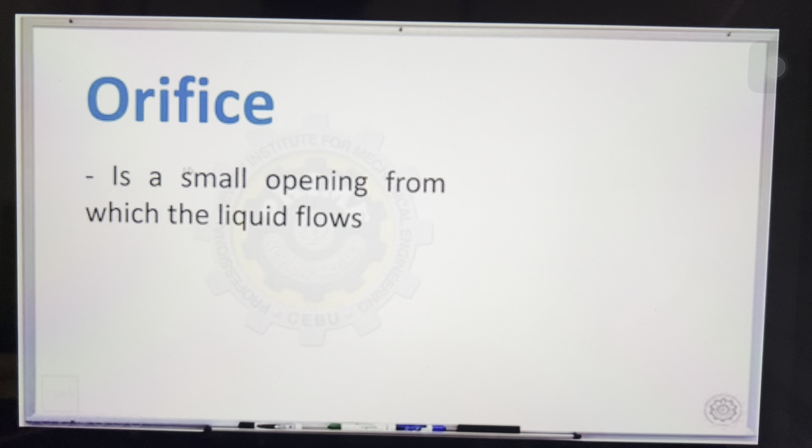Okay, now let's talk about orifice. An orifice is a small opening from which the liquid flows. So ito yung ating visual. Okay, so this is our orifice. And then magpa-flow dito yung liquid.

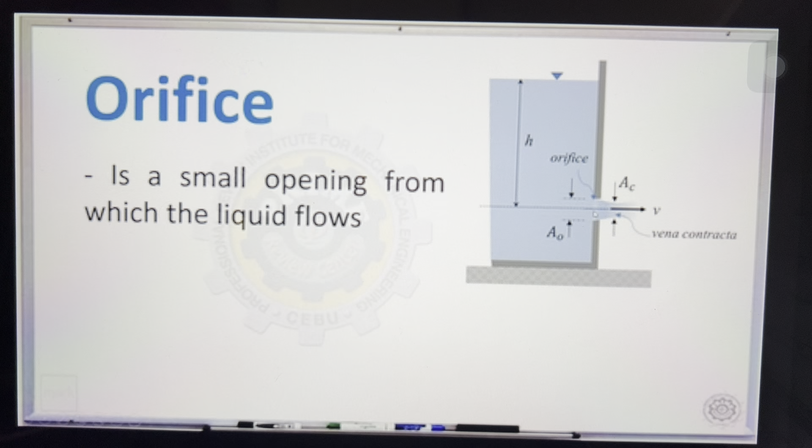So magbibigay ng certain height dito from the top surface hanggang sa opening ng orifice. And then merong velocity. Now kindly take note na yung section at which the cross-sectional area of the jet is

minimum and always less than the orifice is known to be the vena contracta. So meron ditong certain portion na minimum yung area ng ating cross-section ng jet. At ang tawag sa minimum cross-sectional area is the vena contracta.

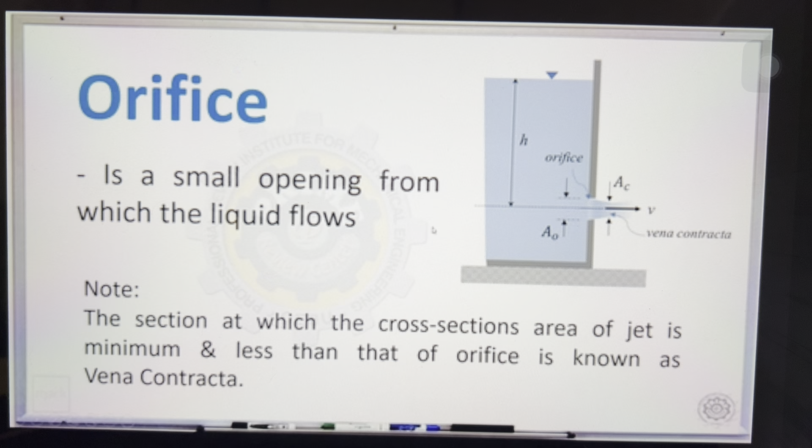Now, regarding sa orifice, marami tayong pwedeng tanungin na coefficients dito. So isa-isahin natin yung mga formula to be used. Okay, so we have hydraulic coefficients. Kindly remember na pag magkakalculate ng coefficients, that is ratio ng actual over ideal value. Laging mas malaki yung ideal value.

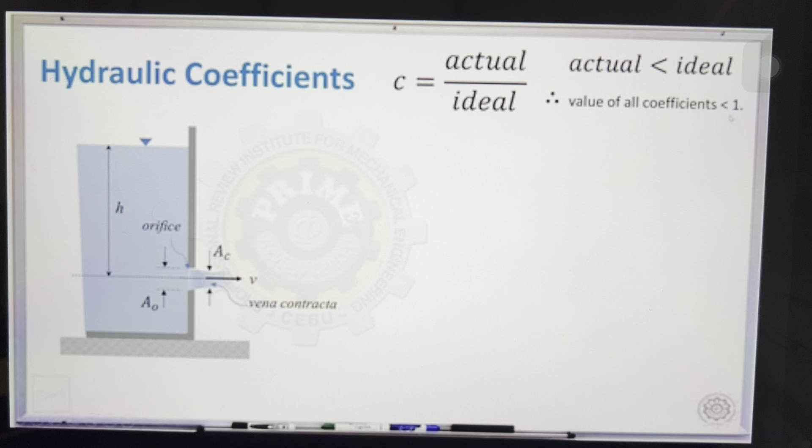So yung actual value is maliit na value over malaking value. Since it is always less than the ideal, na-expect nating value ng hydraulic coefficients is less than 1. Kapag actual tsaka ideal equal, ang value niya is 1. So less than or equal to 1. Now, we have the coefficient of velocity, CV, coefficient of contraction, CC, coefficient of discharge, CD, and then coefficient of resistance, CR. So, isa-isahin natin.

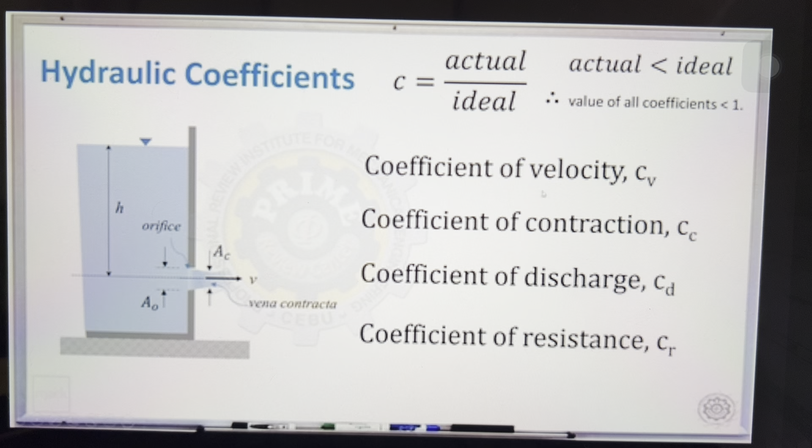Let's start with the coefficient of velocity. Ang coefficient of velocity, ratio siya ng dalawang velocity. Actual velocity of the jet, paglabas, over the ideal velocity at the orifice. So ratio siya ng dalawang velocity.

Now, para makakuha tayo ng velocity, ang formula natin dyan is square root of 2gh. So para sa actual velocity ng jet, dito yung kukunin, so square root of 2gh prime. Para naman sa orifice, dito manggagaling yung velocity paglabas sa orifice, square root of 2gh din. Kasi yung h na gagamitin, ito.

Now, mathematically speaking, pwede natin i-substitute dito, cancelled out 2g, and then ang matitira dyan is yung square root. Pinagsama ko na lang yung square root sign. So you can cancel out 2g, and ang matitira is square root ng h prime over h. Dito yung sukatan ng h prime para sa actual velocity of the jet, ito naman sa ideal velocity. Maiksi lang yung formula, so tandaan yung shortcut na yan. Next,

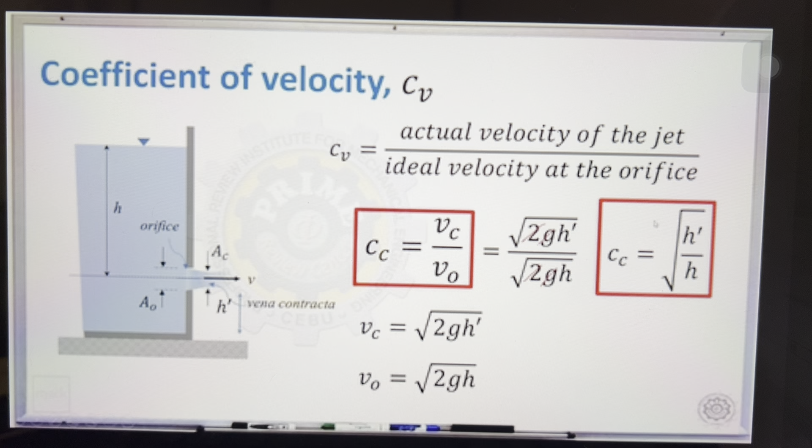coefficient of contraction. That is ratio naman ng dalawang area. Actual area of the vena contracta over the area ng orifice. Yung ideal area natin is the area of the orifice. So ratio ng dalawang area.

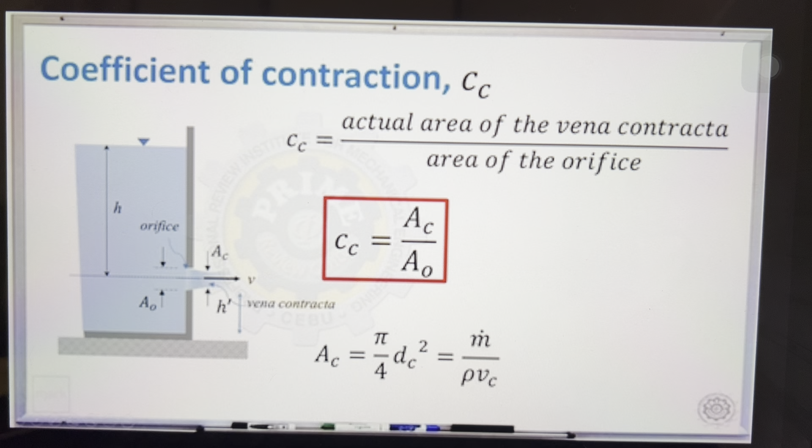Para makakuha ng area, pwede kang gumamit ng pi over 4 d squared, or mass divided by density times velocity. Ang pinanggalingan lang nun is rho AV. You remember, mass flow rate is rho AV. So kung gusto mo makuha yung area, mass i-divide mo ng density times velocity.

Now, para naman sa area ng orifice, kung hindi siya given, pi over 4 diameter ng orifice squared. Pero typically, yung area ng orifice is already given. So this is another formula. You can cancel out pi over 4, and then you can factor out yung naka-squared. So pwedeng ratio ng area, pwedeng ratio ng diameter, kaya lang naka-squared. So this is coefficient of contraction.

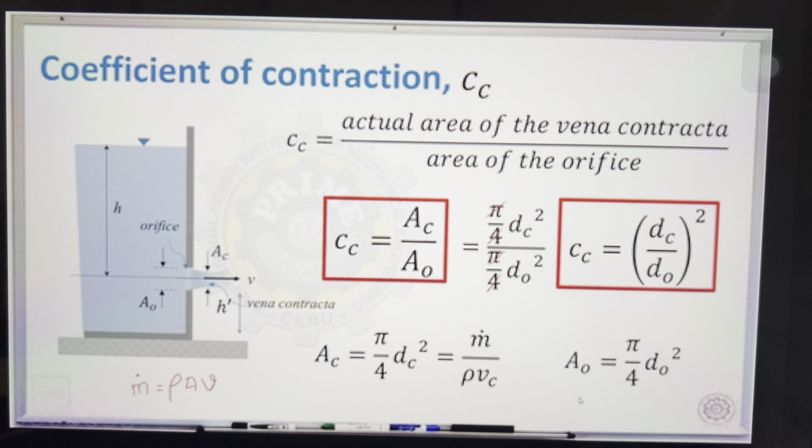Next is the coefficient of discharge, CD. Ratio naman to ng dalawang volume flow rate. This is the actual discharge at the vena contracta over the ideal discharge at the orifice. Mas malaki yung volume dun sa ideal discharge. So ratio ng dalawang volume flow rate.

Now, pwede tayo mag-simplify. Yung volume flow rate sa contracta is area times velocity, and then for the orifice, that is area multiplied sa velocity, kasi formula, Q equals AV. Pag sinubstitute natin dito and simplify further, meron tayo ditong ratio ng dalawang area. That is called CC.

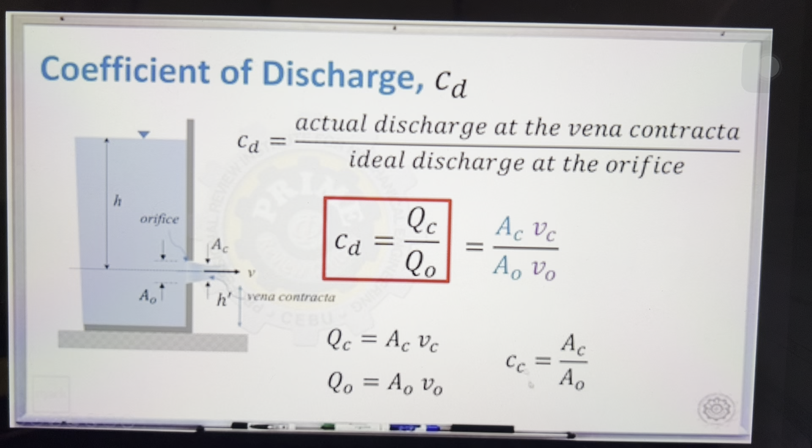A coefficient of contraction, yung part na to. And then meron din tayo ditong ratio ng dalawang velocity. So yung part na to, this is called CV. So bottom line, para pala makuha yung CD, pwede siya kunin using ratio ng dalawang volume or simply you multiply CC sa CV. So pag given na yung coefficient of contraction tsaka coefficient of velocity, ang gagawin na lang, simply multiply yung dalawang coefficients. Then makukuha na natin yung tinatawag na coefficient of discharge.

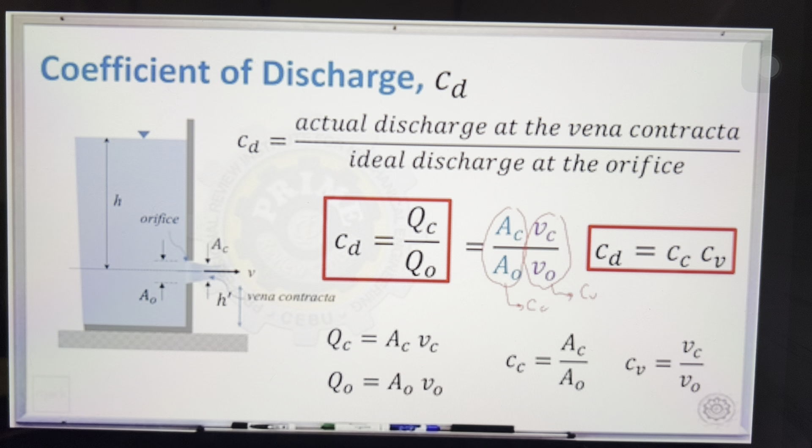Okay, and then for the last, we have the coefficient of resistance. Ratio lang yun ng dalawang head loss. So head loss at the orifice, i-divide sa head at the orifice. So itong height na to, and yung denominator, kapag binigay yung head loss at the orifice. Yun yung tinatawag na coefficient of resistance.

Okay, elaborate ko yung formula kanina. If you remember, ang formula natin ng CD is ratio ng dalawang volume flow rate. So, actual volume flow rate over the ideal volume flow rate. So, para makuha mo yung actual volume flow rate, once given na yung CD, coefficient of discharge, i-multiply mo lang sa volume flow rate at the orifice. Para makuha yung volume flow rate at the orifice, that is area times velocity. And then para makuha yung velocity at the orifice, square root of 2gh. So, nilagay lang natin yung mga formula para mas simple. Kaya ang kailangan na lang dito is sample problem.

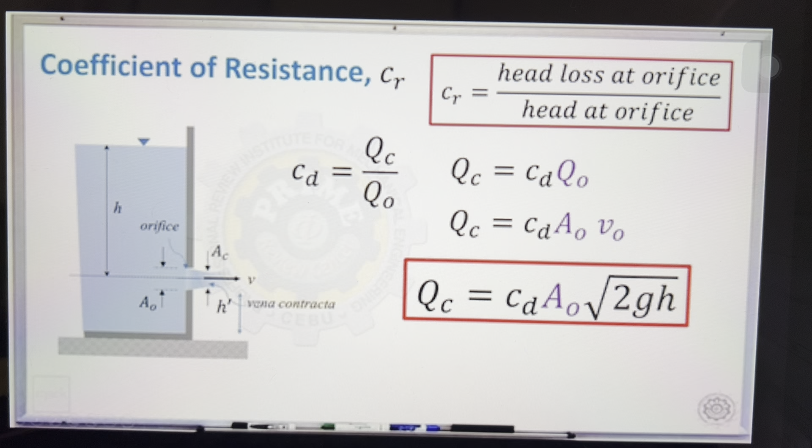Again, yung QC natin, yan yung actual volume flow rate. So, that is the actual discharge at the vena contracta. Yung madalas itanong. So, given yung coefficient of discharge, given the area at the orifice, and then pag binigay yung height dito, makukuha niyo yung ideal velocity, square root of 2gh. That's it. Sample problem tayo. Apply natin yung mga formula.

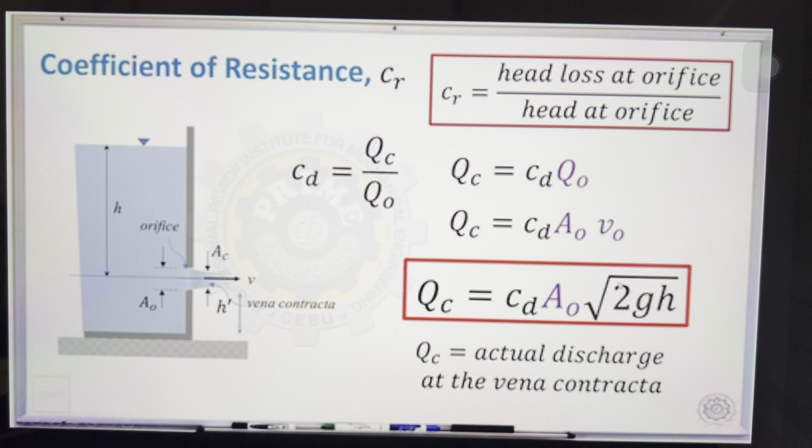Okay, sample problem for orifice. What is the actual volumetric flow rate for the discharge of the tank shown? The coefficient of contraction for the orifice is 0.61 and the coefficient of velocity is 0.98. So in the figure, given na yung area of the orifice na 0.5 square feet and then given the ideal height na 8 feet. Ang tinatanong is the actual volumetric flow rate. Madali lang ito considering na na-discuss natin yung mga formula. Isolate and then substitute tayo.

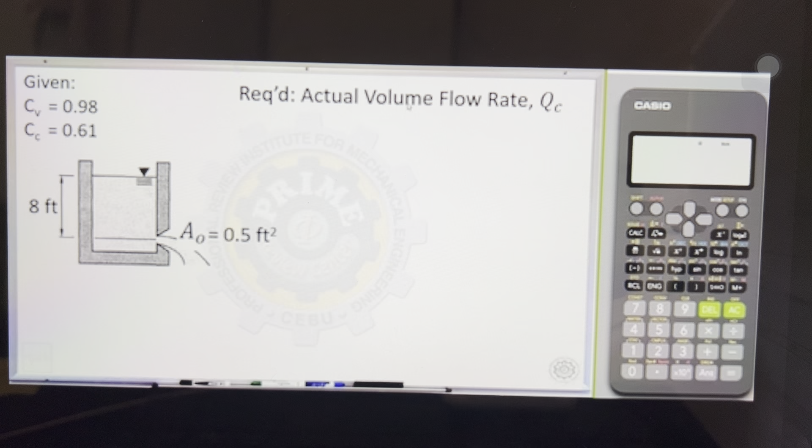So ang given is CV tsaka CC. You have the ideal height and area of the orifice. Ang tinatanong is the actual volume flow rate. So we have derived this formula na ang formula ng actual volume flow rate is coefficient of discharge, area of the orifice, square root of 2gh. So given naman yung height, wala tayong problema doon. Given yung area of the orifice, ang nawawala lang talaga is yung CD, coefficient of discharge. Since given yung CV tsaka CC, na-derive na natin na yung CD can be calculated using product ng CV multiply sa CC. So kompleto naman yung ating given. Hence, direct sub na lang.

Substitution na lang. So you have actual volume flow rate is equivalent sa CD, which is 0.98, multiply natin ng 0.61. So that is our coefficient of discharge, yung product ng dalawa. Area of the orifice is 0.5 square feet. And then square root of 2gh.

Square root of 2gh. So 2, ang gravity natin should be in English, 32.2. And then yung height natin is 8 feet. So pag sinimplify mo yung units dito sa square root na yan, ang lalabas dyan is feet per second. So pag minultiply natin yung feet squared sa feet, magiging feet cube per second. So makukuha na natin yung tamang sagot.

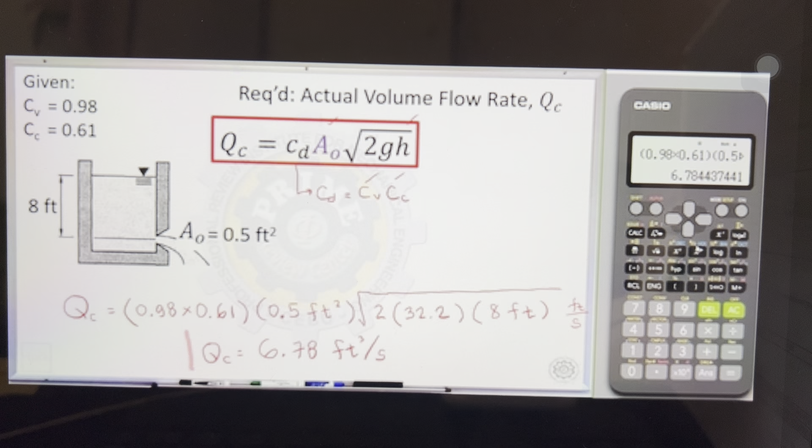So finally, our actual volume flow rate should be, calculator na lang, 0.98 multiply natin ng 0.61. Then you have 0.5, square root of 2gh. So 2, 32.2, and then 8. So kompleto yung given, tama yung formula, direct substitution. So ang tamang sagot should be 6.78 cubic feet per second. So this is our actual volume flow rate. Okay.